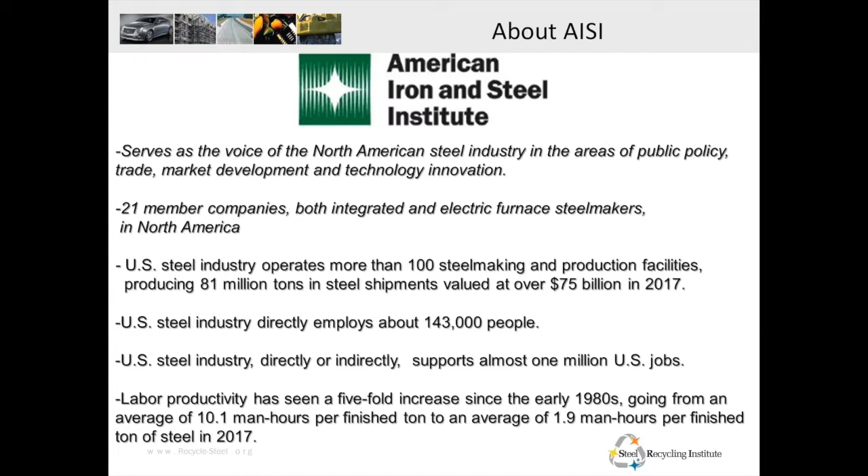Also, this last point on the slide is very important. Since the 1980s, we've invested a tremendous amount of financial resources in technology to decrease the amount of worker hours per ton it takes to make a finished ton of steel. We went from 10.1 man hours per ton to 1.9, making us one of the most efficient steel producing countries in the world.

As you can see by the diversity of our member companies, the current trade issues in the news make it very interesting for our association, trying to walk that fine line between supporting the various tariff moves to enhance our industry, while being cognizant of our Canadian and Mexican members.

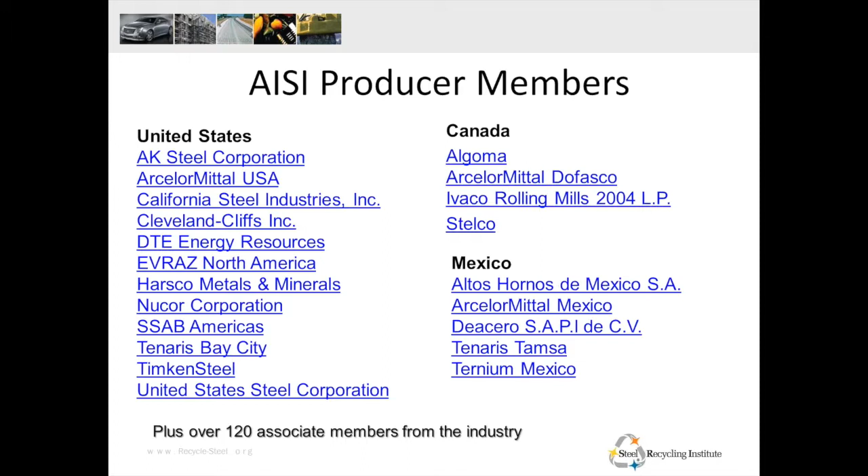The Steel Recycling Institute has changed over the years. We've changed our mission, becoming more of a research organization - we're a clearinghouse for life cycle assessment data for North American steel. We develop life cycle assessment studies and environmental product declarations for various steel products. We also track energy data for North American steel.

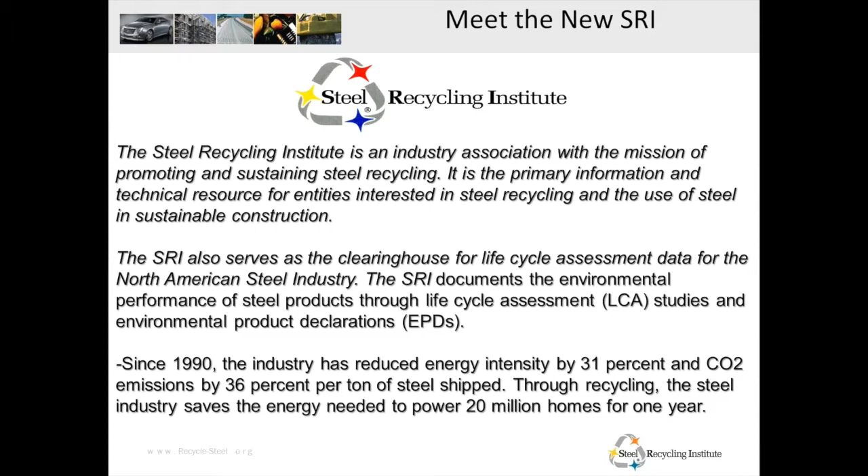This one last tidbit shows that we've done a lot of things to decrease our use of energy, or energy intensity, over the last 20 plus years, and been very successful at it.

One thing that hasn't changed for the Steel Recycling Institute: we are still a big supporter of recycling organizations across the country. As Wayne mentioned from my bio, we belong to and try to be active in all of the state recycling organizations across the country, as well as various organizations at the national and regional level. We also encourage everyone on the webinar today to either join these organizations or sponsor or support them in your own way.

Now let's get to the nitty-gritty. Why do we recycle steel? It saves a tremendous amount of natural materials, but most importantly, it saves a tremendous amount of energy. You can see we save so much energy from steel recycling that you could power 20 million homes over the course of a year. So it's a very important part. I believe that all materials - plastics, glass, paper, and others - are similar in their energy savings.

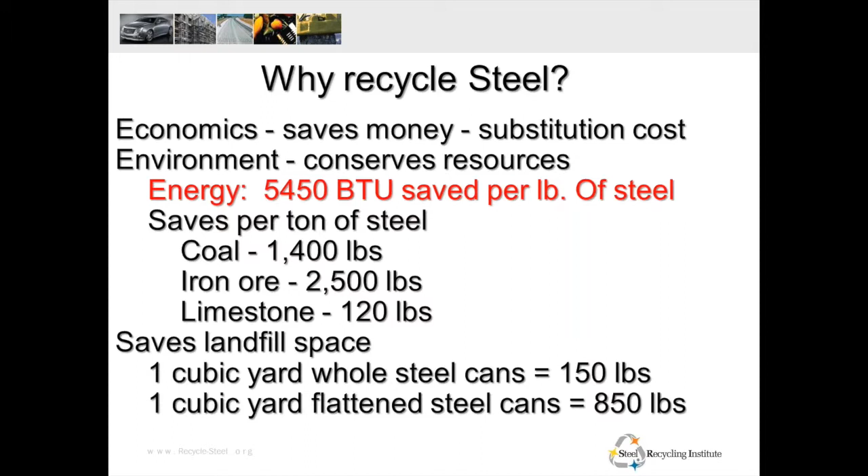It's a necessary part of the steel industry because our use of energy is very intensive as well. But as I mentioned, we have reduced that consumption by about 31% since 1990.

One other thing to remember: if you take all of the materials combined - paper, aluminum, glass, and plastics - they still don't come close to the recycling effort of the steel industry. Steel is the most recycled material in North America, and I know our friends in the asphalt and concrete industry have some concerns about that, but until we sit down over a beer, we'll continue saying that. Why is that?

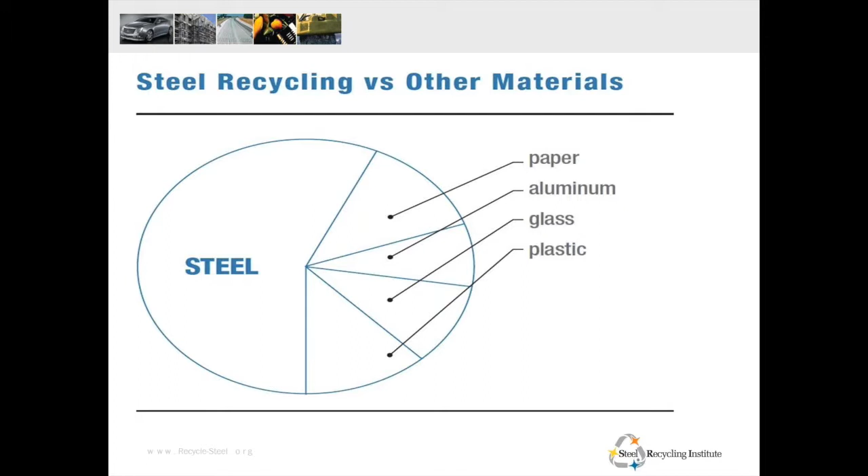It's because steel is magnetic. It's the easiest material to pull out of any type of recycling program that your community or jurisdiction decides to put in place - drop off, curbside collection, single stream, buyback, or waste-to-energy. The steel can be pulled out with a magnet. It also helps that we have over 100 melting facilities across the country, and rely on the 2,600 scrap dealers across the country that bring that material to us.

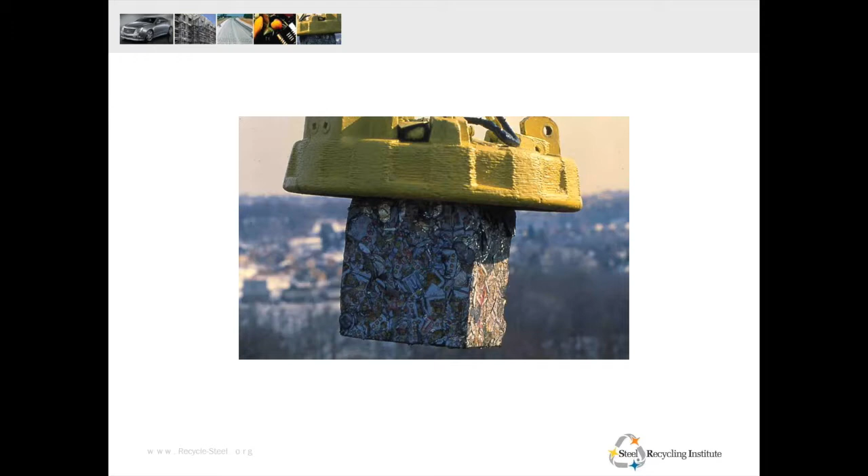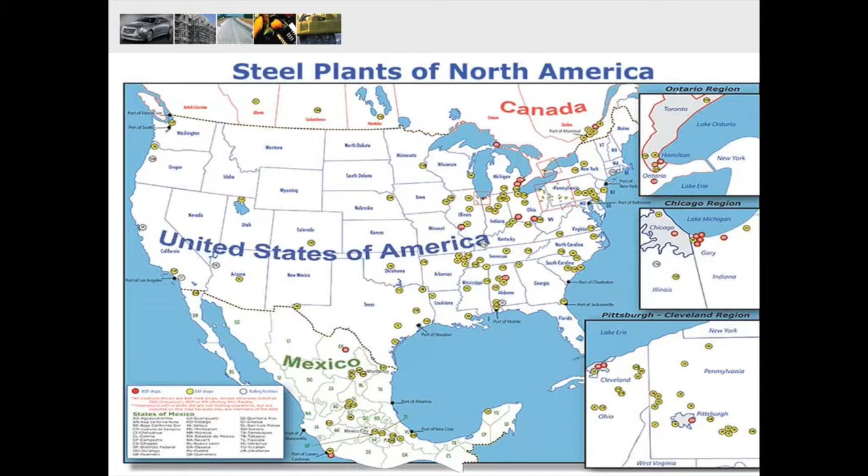There are two types of steel furnaces used in the production of steel today. The basic oxygen furnace, or integrated mill, produces about 40% of overall steel production and uses between 25 to 35% steel scrap. The other type is the electric arc furnace, or mini mill. Currently about 60% of all steel production in the U.S. is made with the mini mill, and it can use virtually 100% recycled steel scrap in its process.

It depends on what type of product it's making. For example, some structural steel may have 90-95% recycled content along with iron ore pellets, while some rebar may be virtually 100% recycled scrap. So it depends on what they're making in that type of furnace.

When I started 35 plus years ago in the industry, the basic oxygen furnace was the dominant way to make steel, and the mini mill was catching up quickly. Now it's completely taken its place.

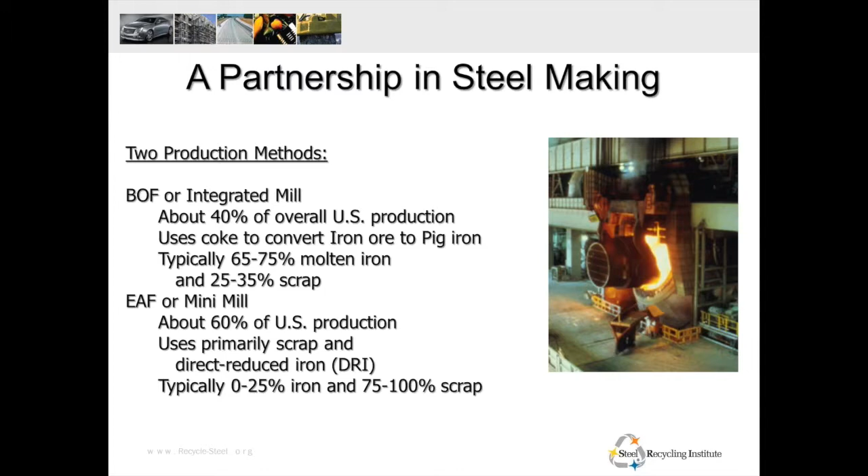This is a very busy slide, but the main thing to take away is that both the electric arc furnace and basic oxygen furnace systems use recycled steel scrap in their process. They also use some form of iron or iron pellets, which may come as pig iron, the product of the blast furnace, or from iron pellets made by a different method. The main thing is you have to have old steel to make new steel, and all steel furnaces use recycled steel in some form.

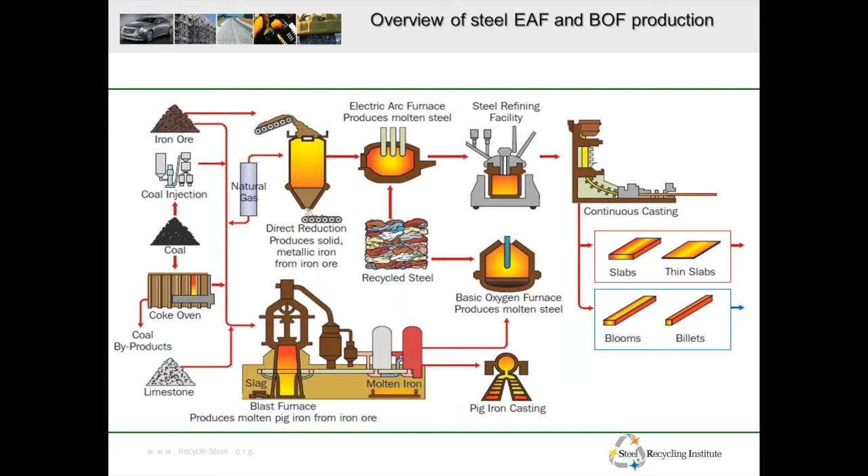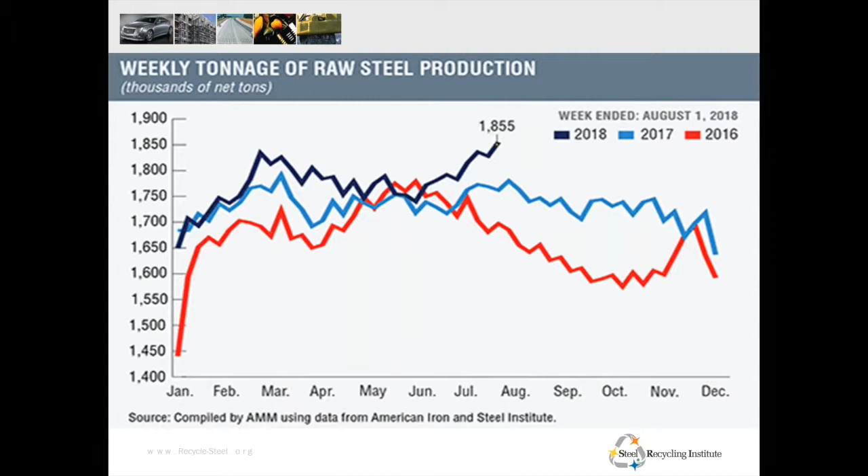As you'll see in a few minutes, we've bounced back considerably from there.

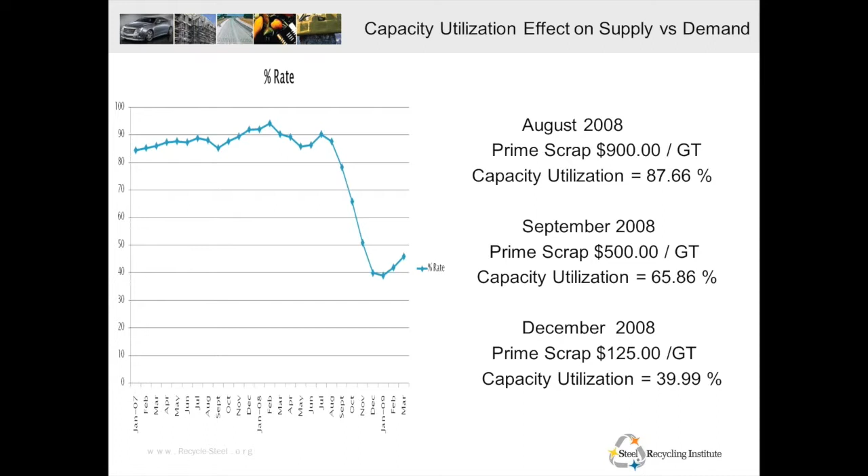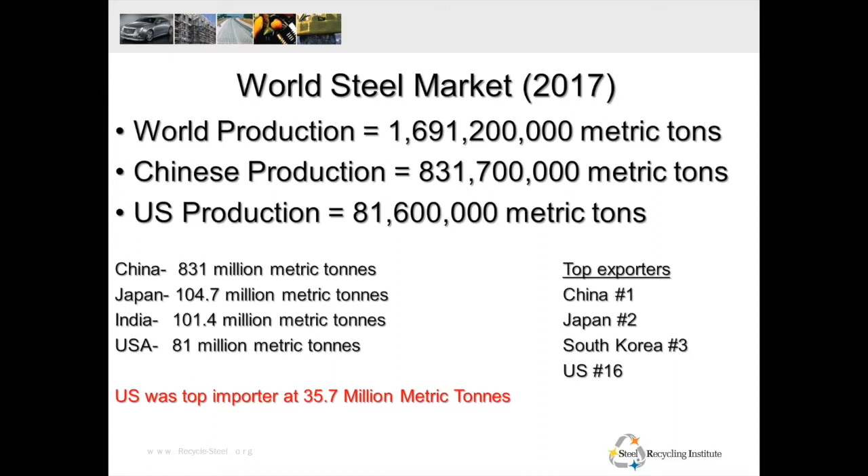Historically, imported steel has been about 15% of our marketplace, and there's always a place for imported steel. The problem has been that a lot of countries have been dumping imported steel here over the last 5 to 6 years, and the rate has been closer to about 35% of the marketplace, which is almost double. That's why I think you're seeing some of the trade and tariff issues being put into place, to try to correct that and get to more of a fair trade system versus what they call free trade.

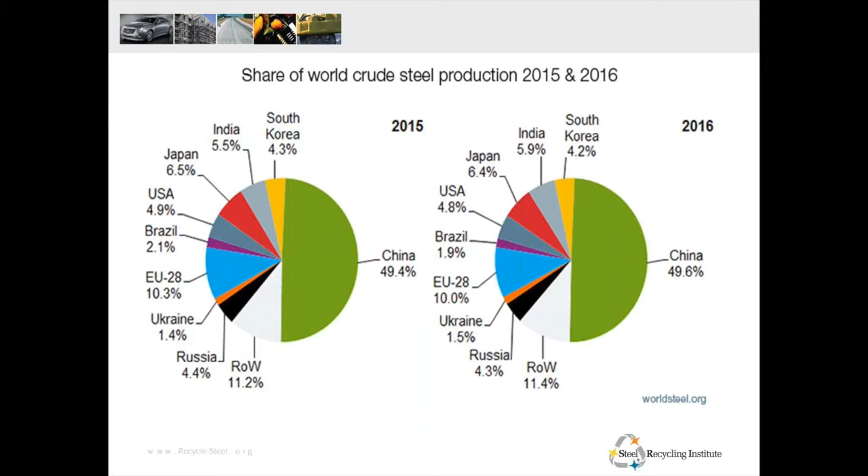They have a use for 400 million tons of their production, so the other half needs to find a home. Unfortunately, it's finding its place elsewhere in the world.

Home scrap is the scrap that's generated in the steelmaking process. For example, if the customer's order calls for a 30-foot beam but the beam comes out 32 feet, they'll weld off that extra 2 feet and put it back into the process.

The third is obsolete scrap, and that's what we're talking about mostly today - steel products that have reached their end of useful life and get recycled back into the process.

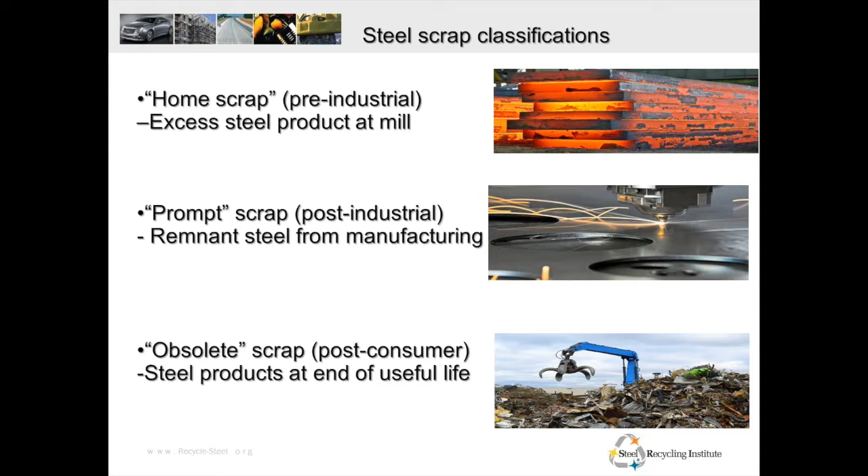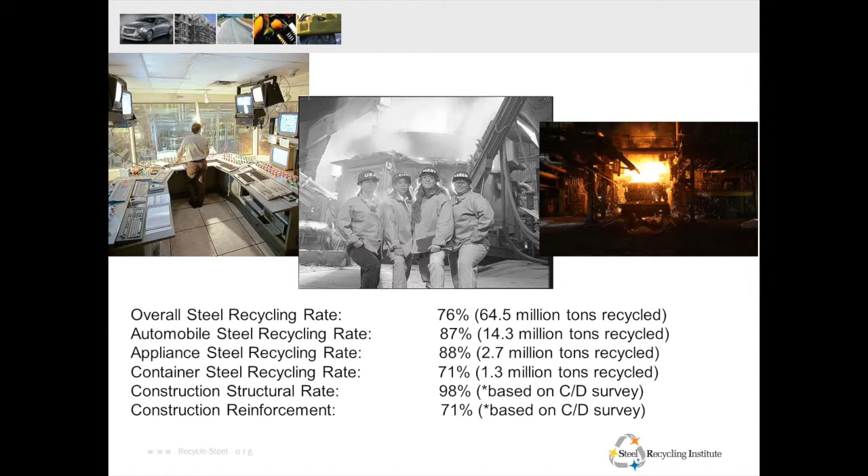Automobiles are your most recycled consumer product because of the steel content. Appliances the same way. And construction - you seldom have a demolition project where there's not a roll-off there for your steel scrap.

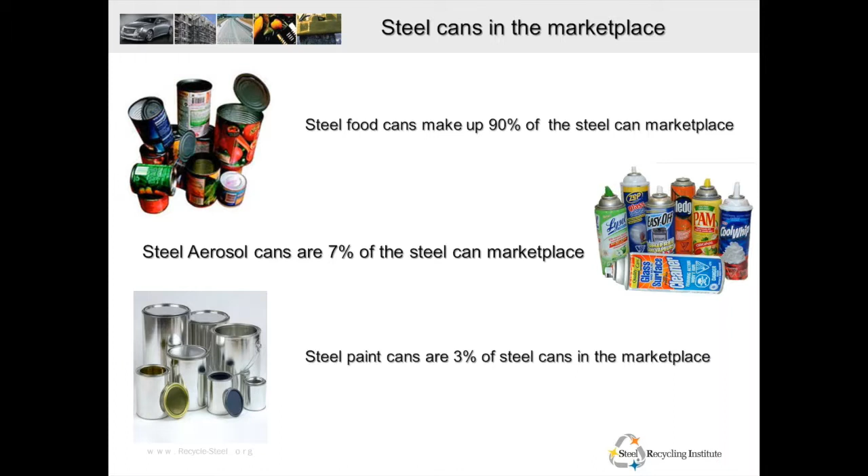Let's talk about steel cans for a moment. When you talk about steel cans in the marketplace, 90% are food cans, another 7% are empty aerosol cans, and the other 3% are paint cans. The steel industry would like to have them all back. Steel cans represent about 2% of our production and they'll easily absorb back into the system when they're recycled.

Now, often you hear in the last couple of years about the evolving ton of recyclables out there. Our concern is twofold: you have a product, the StarKist tuna can that's made of steel, and it's being replaced or displaced, if you will, by the flexible pouch.

The flexible pouch is a very interesting packaging - there's a lot of sustainable attributes that make it worthwhile. The concern we have is that not only does it displace the steel cans, but when it's put in the recycling bin due to wishful recycling, it becomes flat and mixes in with the fiber in the recycling stream, contaminating the fiber because it's basically two dimensional. So that's a concern there.

Now, obviously there's a lot of work by that industry to make this more recyclable, and hopefully there'll be a system to do that.

The other issue we have - and I want to shout out to the Association of Plastic Recyclers - when there was a proposed plastic vegetable can coming to market, they railed against it because not only are you contaminating the steel industry with excess plastic, but you're also contaminating the plastics stream with the steel lid and ring left over. So it's my understanding that was pulled from market. I'm not sure where that stands now, but once again, you're displacing a recyclable product with something that may or may not be recycled properly.

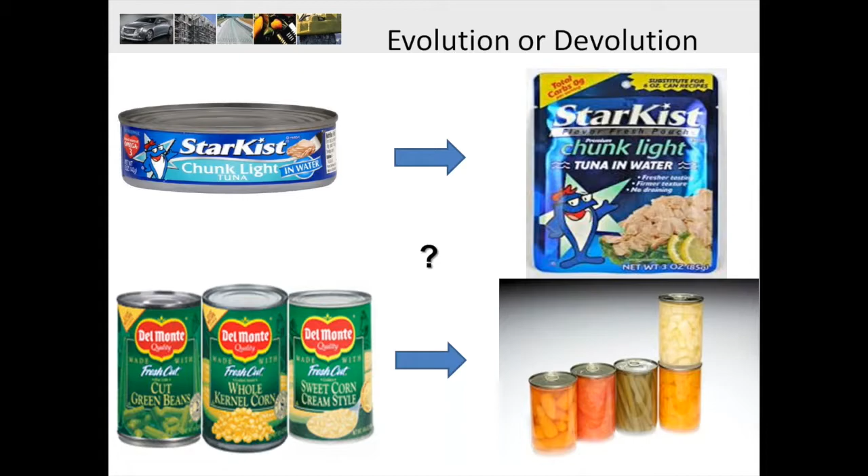There's a lot of facts available at cancentral.com, and one of the two interesting ones I find is that 80 to 90% of all steel ever produced is still in commerce, which is great.

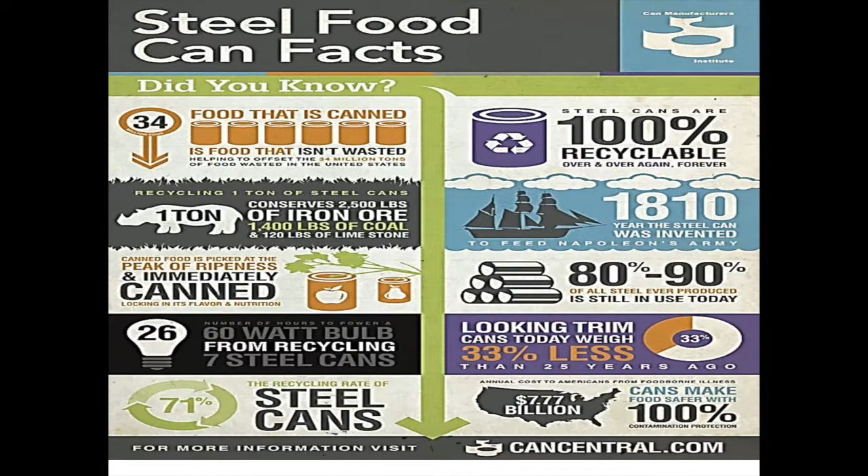Little historical fact: what made Napoleon so successful in his efforts to conquer Europe was that they invented steel cans, or tin cans, prior to that, and they always say an army moves on its stomach. More information like that is available at cancentral.com.

Let's talk about aerosol cans. Over 5,900 programs across the country - curbside, drop-off, waste-to-energy - include empty aerosol cans in their steel can mix. 72 of the top 100 programs include them. And according to the recent access to recycling study done by SPC, over 70% of Americans have access to

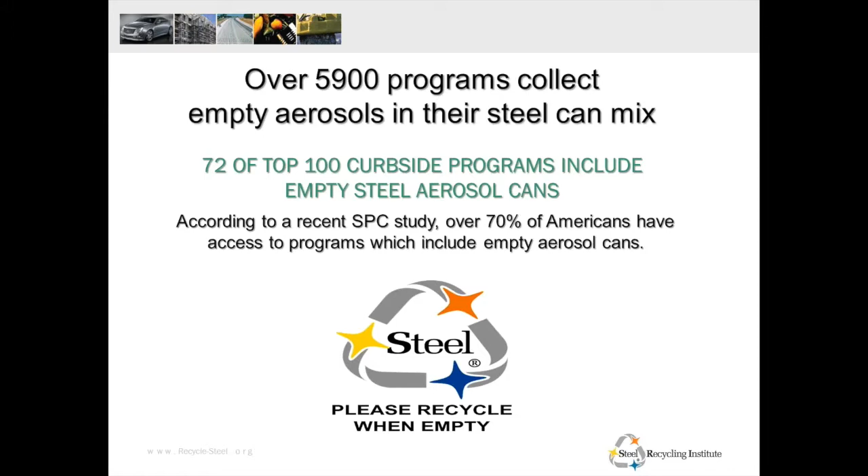recycling of empty aerosol cans. And as the logo says, please recycle when empty.

Let's move to paint cans. Approximately 4,800 programs across the country include empty paint cans. What we're looking for is not last year's garage project with 2 inches at the bottom, but paint cans with only a dry skin of paint that is completely dry. The lid off the container should be recycled as well, but it should be left off the container so that we can make sure that the can is empty.

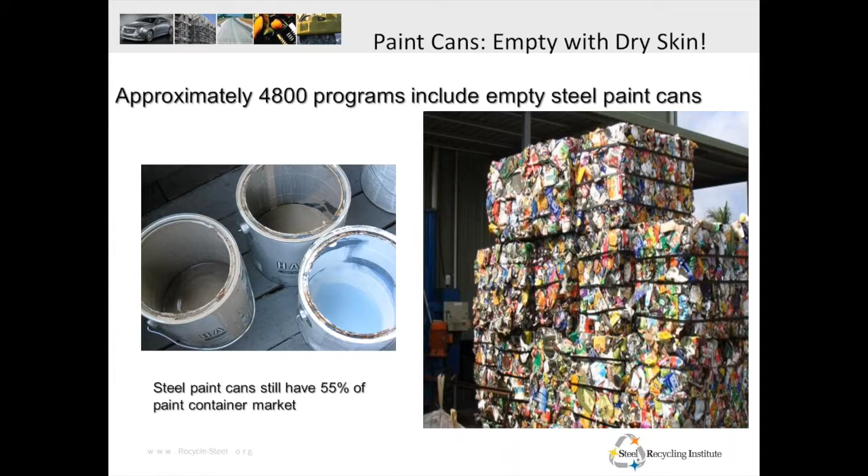For those who haven't been to their hardware store lately, you may see a lot of plastic paint cans, but I just want to let you know that we still control about 55% of the paint can market. So recycle your paint cans.

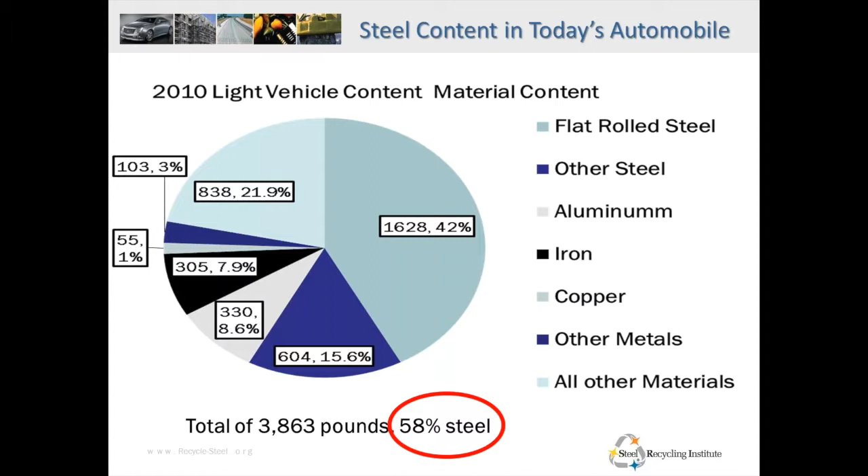Switching to automobiles, for the last 5 decades, while the overall mass or weight of the vehicle has come down, the percentage of steel in those vehicles throughout those 5 decades has remained fairly constant, between 58 and 59%. The automobile is the most recycled consumer product because of its metal content, both steel and non-ferrous.

There's been a lot of efforts by the automobile industry to lightweight their vehicles. They've looked at other materials instead of steel to achieve this. There are concerns because during the production phase of those lightweight materials, their greenhouse gas emissions are considerably higher than they are for steel. So the steel industry has been very aggressive in developing new steels that are stronger, but can be made in a way that reduces the overall mass of those products going to the automobiles.

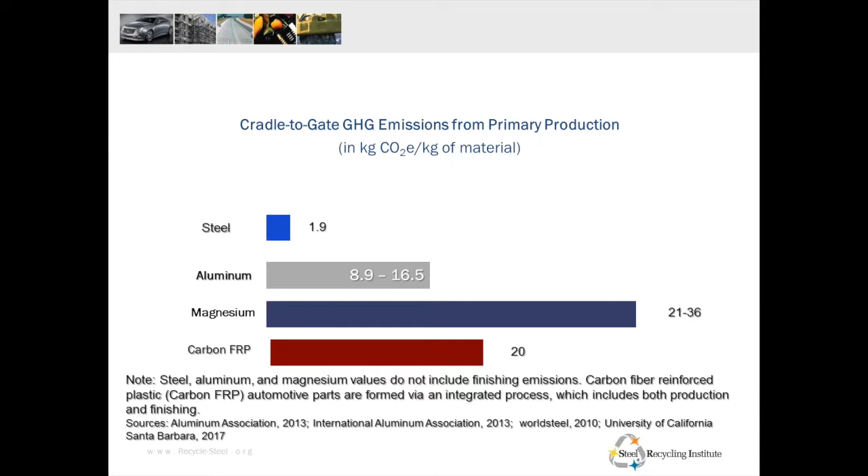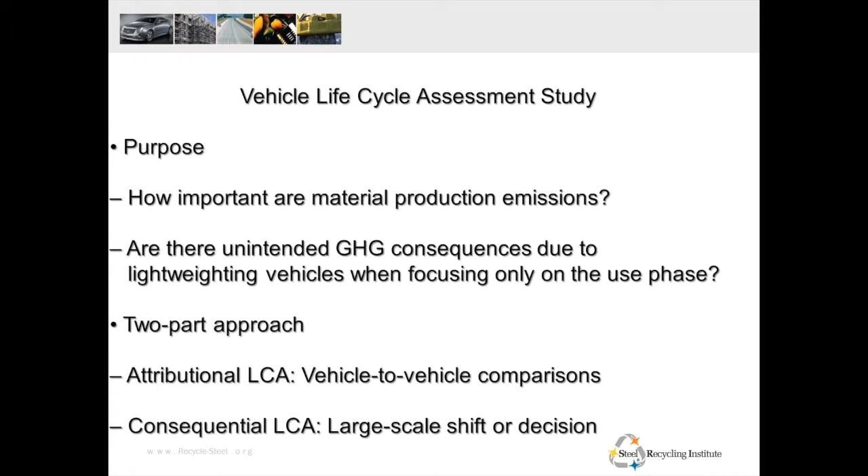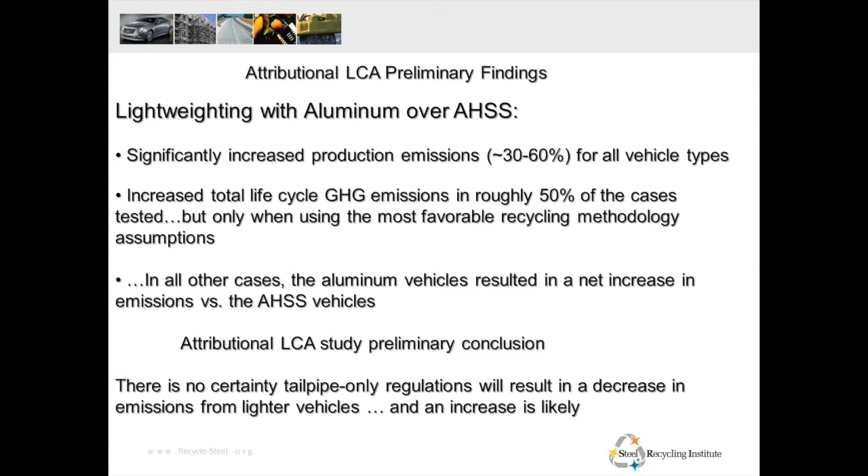So looking at that, we did a life cycle assessment study on vehicles, and we looked at these issues you see on your screen now. Here's a couple of conclusions: when you're lightweighting with aluminum versus advanced high strength steel, you actually increase the production emissions for all vehicles. And because of some concerns about recycling, you actually reduce the environmental impact in greenhouse gas emissions by using the new steels versus aluminum.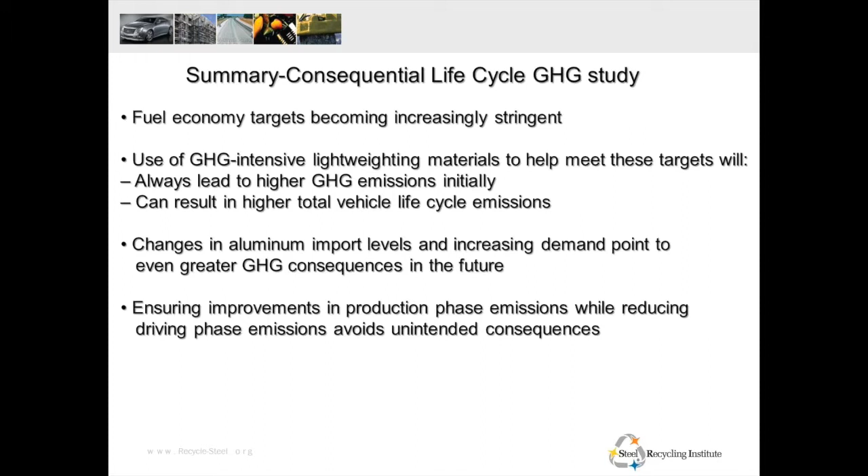The main thing to remember is that no matter what type of vehicle you drive, it is the steel in that vehicle that keeps you safe. There's more information available at steel.org, which is one of our websites.

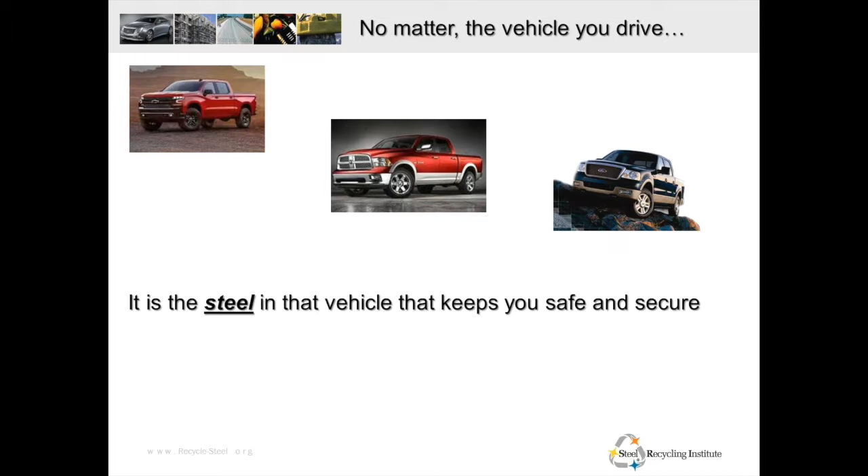Appliances, as I mentioned, a typical appliance is produced using 65% steel, which is the reason why nearly 90% of discarded appliances are recycled each year.

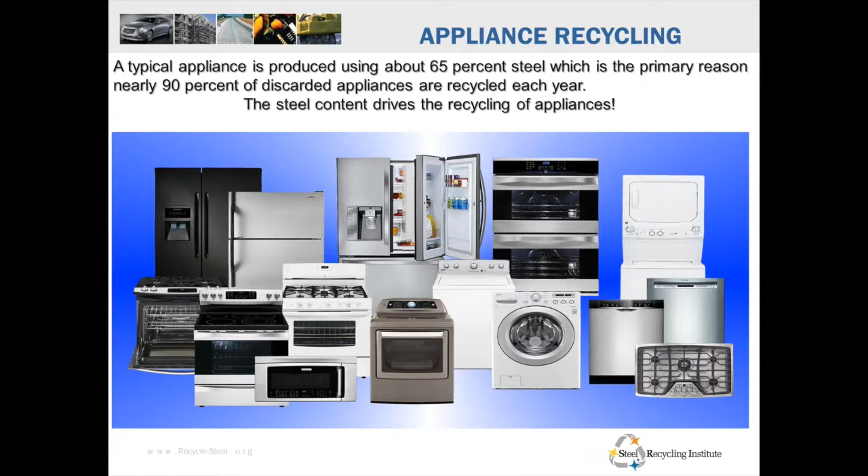Illegal dumping is an issue everywhere, not only for some steel products unfortunately, but also for other materials. The thing is, when steel markets are good, you tend to see a lot less appliances being illegally dumped.

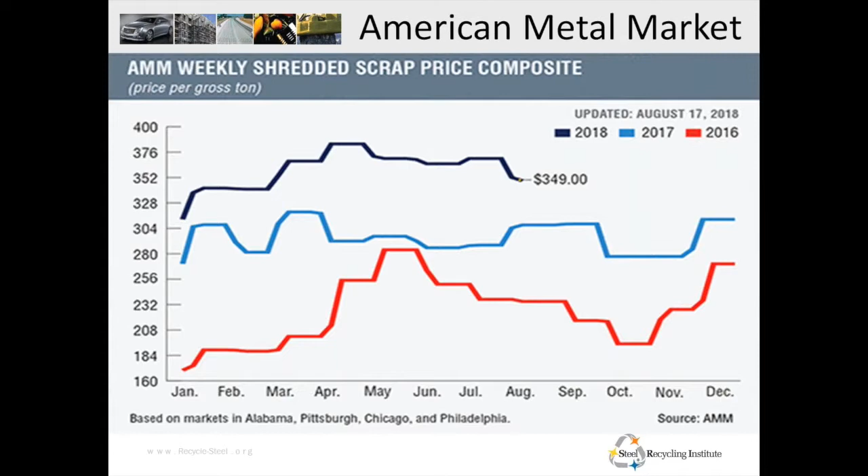This graph shows the weekly shredded scrap price composite. This is a combination of auto shred and also appliance shred. You can see it's come down recently, and I think that could be because Turkey went out of the market due to the tariff dispute with the Trump administration. But I could be wrong about that. The main thing is we're much higher than the last two previous years, and it's going in the right direction for the most part.

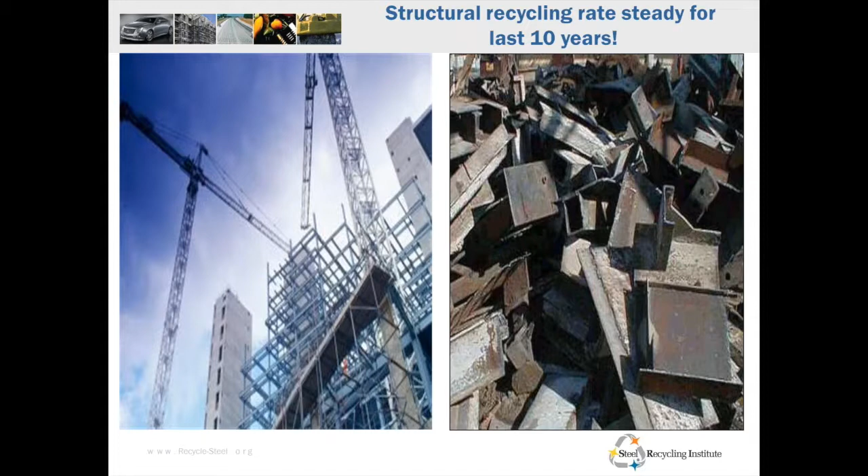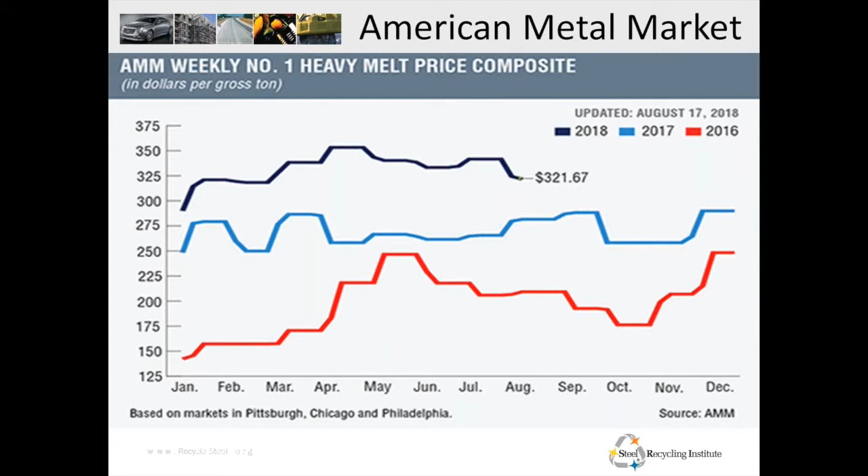As I mentioned, when you have a demolition project, you're going to see a roll off there for the structural steel that gets taken out, and this is a similar composite of the number one heavy melt, which is the grade for essentially structural steel. Once again, it's much higher than the years past, and is staying fairly consistent in its overall range.

The Steel Market Development Institute also does a lot of market development stuff, hence our name. We do a lot of upstream work in terms of research for the automobile industry. We are very encouraged by the discussions about investing in the overall infrastructure of the United States, because when you build bridges and build roads, you use a lot of steel.

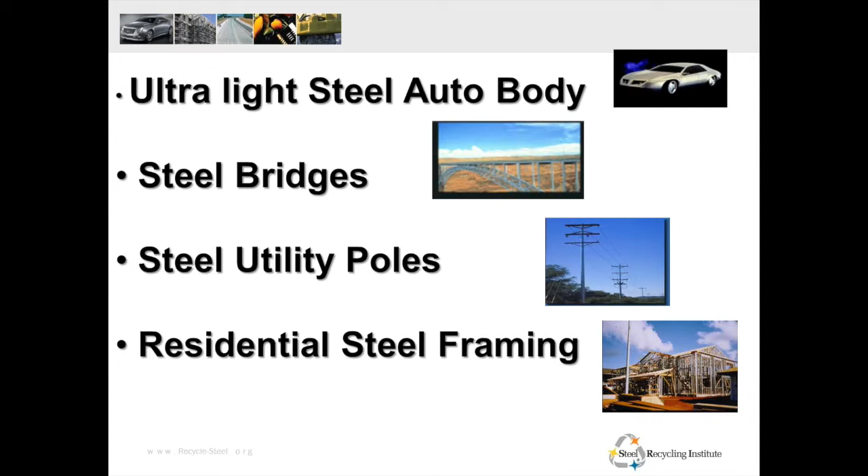We also work with the utility industry to get them to look at using steel utility poles versus the creosote soaked wooden poles that have been a concern for a number of years. We are also very active with a number of organizations in residential steel framing and structural steel, use of structural steel in sustainable construction. We are a national member of the USGBC, and we are also a member of every chapter across the country.

If folks are interested in how to use steel, the website is buildusingsteel.org. You can find information on how to use steel to get your LEED points, and also there are the current industry-level environmental product declarations available from the steel industry.

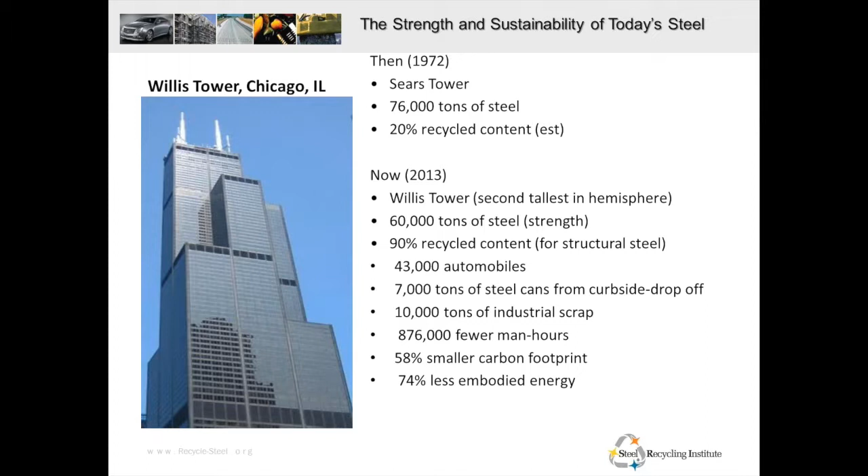Just to give an example of how things have changed in the steel industry: back in 1972, they built the Sears Tower, now called the Willis Tower. About 76,000 tons of steel was used, with an estimated 20% recycled content. Today, building that same tower would use about 60,000 tons of steel, a decrease in amount, with a higher recycled content close to 90% or higher. This shows some of the other environmental attributes that would now apply if you built that tower using today's steel.

As I mentioned earlier, we rely on the 2,600 scrap dealers across the country. They've been in business for a number of years, if not generations. A lot of them started out as wood and grease collectors back in the early part of the 19th century, and have since gone on to ferrous, non-ferrous, and other materials.

We also work very closely with the Institute of Scrap Recycling Industries, both their headquarters staff and their local and regional chapters across the country. We always try to direct people toward ISRI members because they've got a great program in terms of environmental compliance, education, and safety. So it's very important to know who you're working with and make sure they're doing things the right way. That's why I'm very comfortable directing people toward our friends at ISRI and their members.

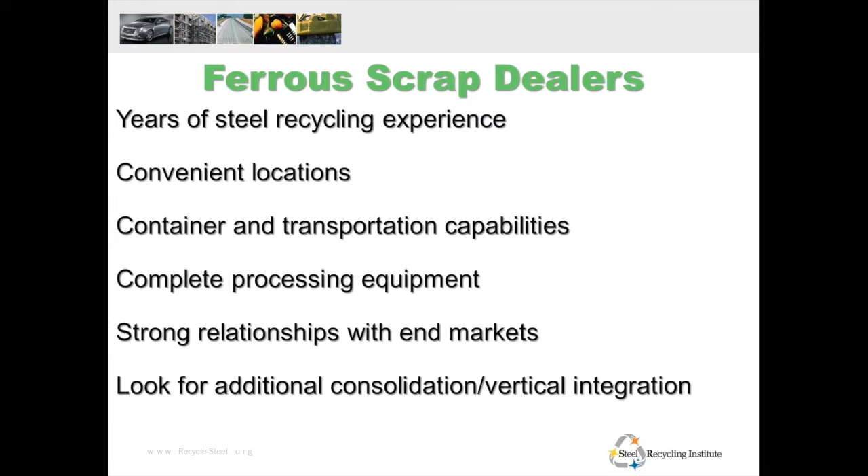Well, that's all the comments I have today, and I look forward to any questions you might have. Thank you.